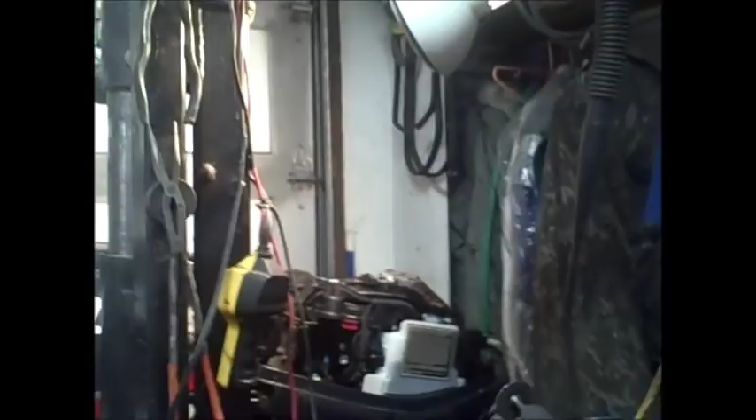And so we put a new water pump in it. Pretty straightforward as far as this one goes. It's a 2014. So yeah, let me show you the motor here. Okay, there's the bonnet for it, and there's the motor. It's a nice clean motor, and so let me get the parts that I had, and I'll show you what I found. Be right back.

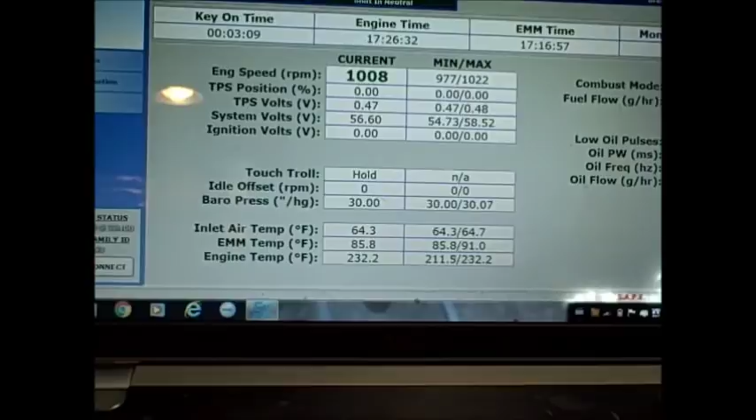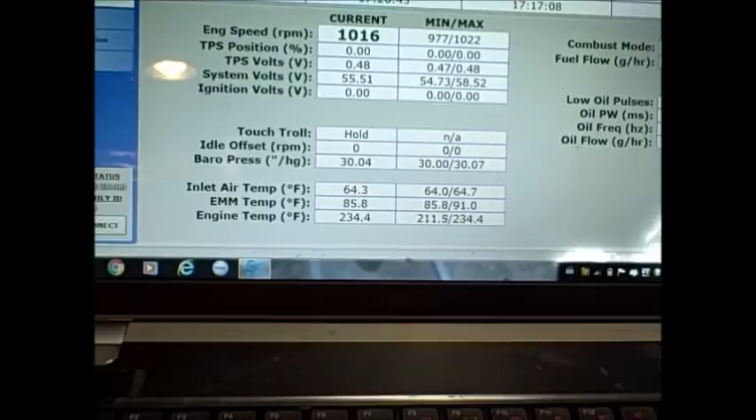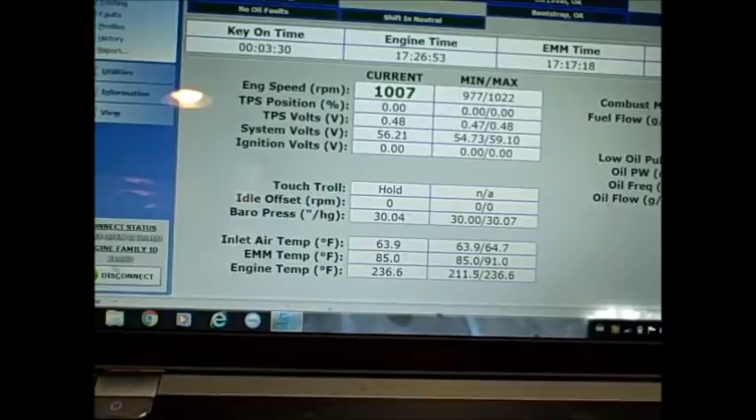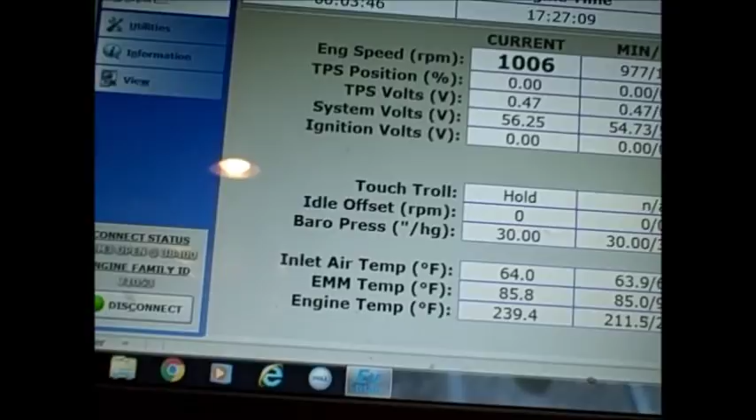And yeah, see, EMM temp 85.8. I'm just kind of talking out loud here, so I'm getting no low oil pulses. Interesting. The voltages, everything's outputting there. And you can see the engine just shut down there, and okay, no connection.

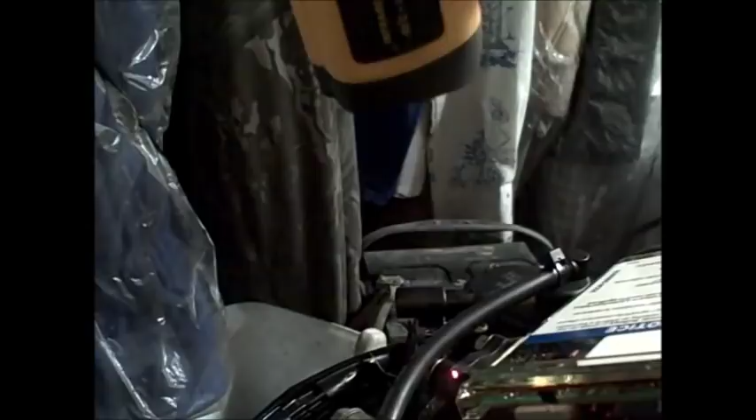And when I take my temp gun in, the engine actually smells warm. When I get up close to it like this, it may just be because it's fairly new. It said it only has 17 hours on it, but I'm getting 230 degrees there. That's hot. It is peeing, but it don't seem like it's peeing like it should. Let me get a couple more temperature readings. Okay, I was on the aluminum, on the injector side. Let me see. Yeah, 227.

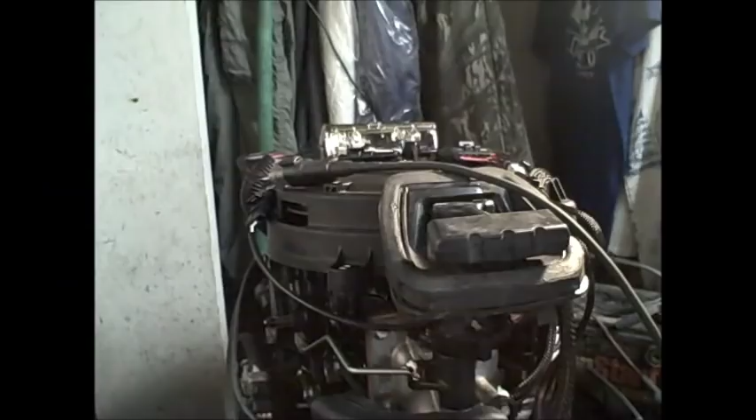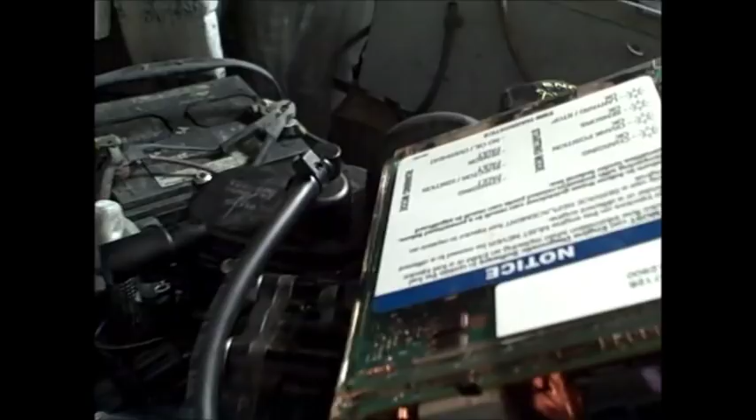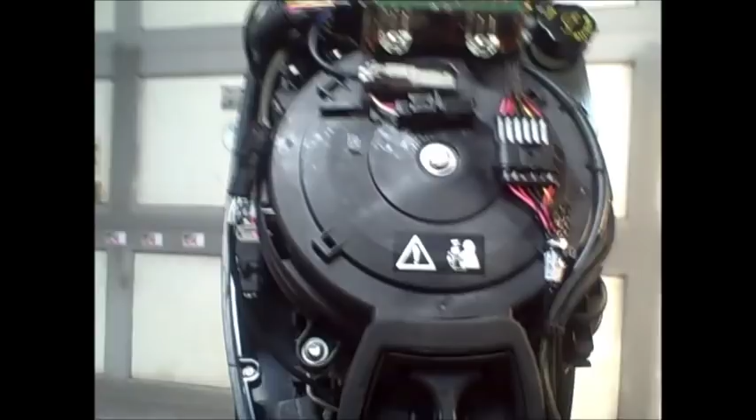Looks pretty clean in there, everything looks pretty decent. So I'm thinking maybe that's all it was. So we'll get a new impeller in there and see if that takes care of it. Be right back. This is an E30 DRL ABB 2014.

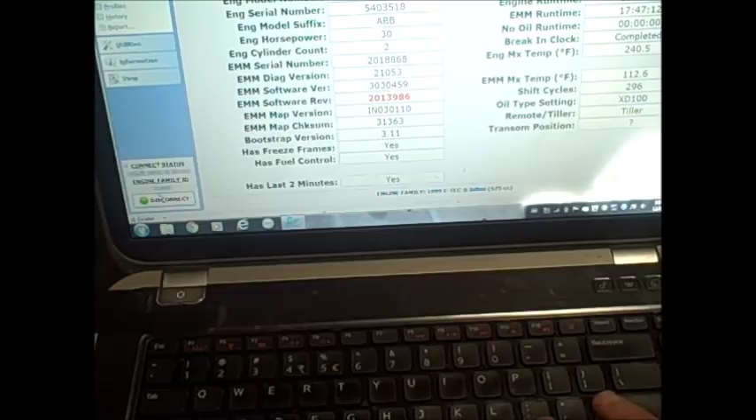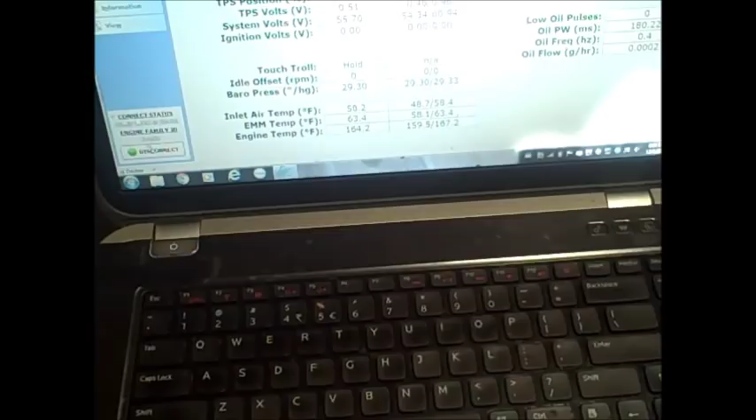You can see right here where at one point it got up to 240.5 degrees. Let's go see what she's running now. 164. So right at 165. So she's running nice and cool now. So I think we got that problem taken care of. Show you the little motor. There she be.

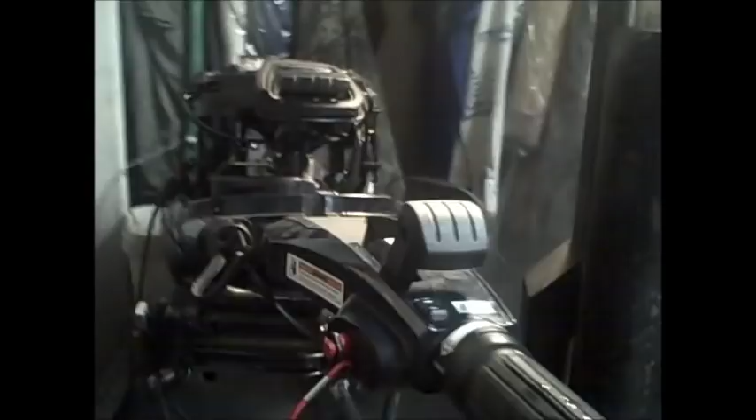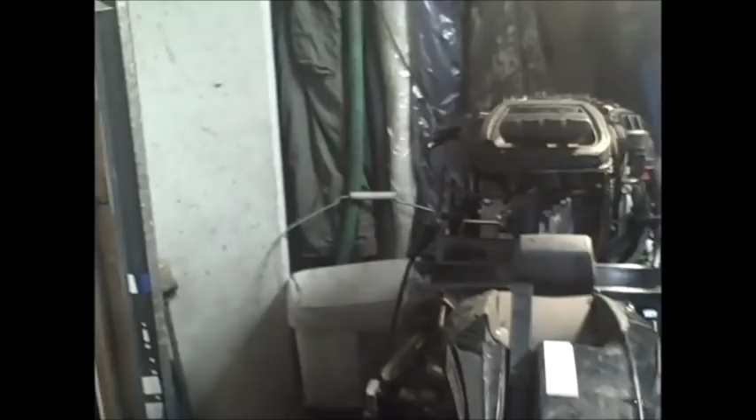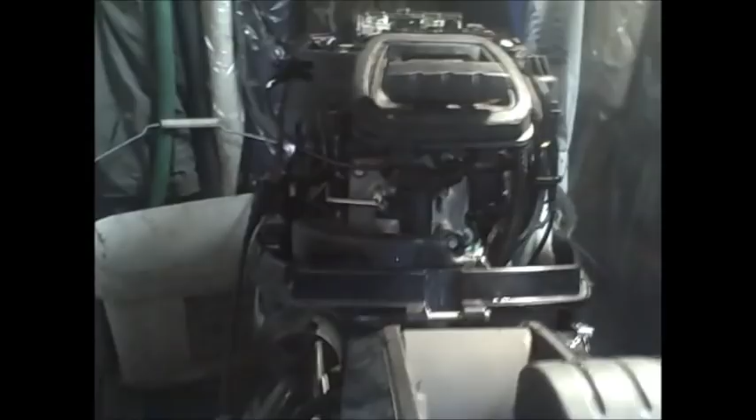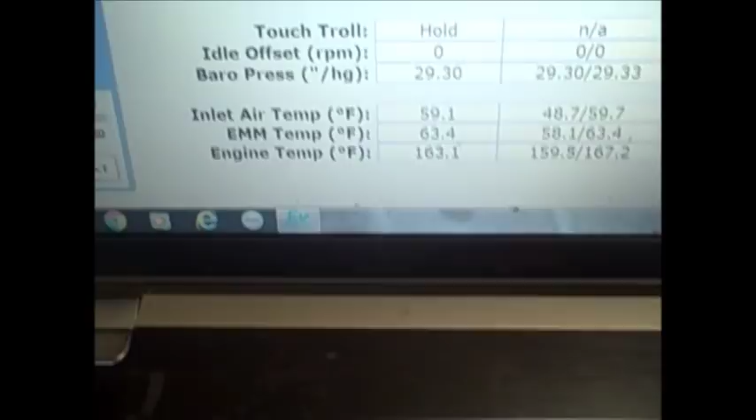We have no code lights up on the EMM. Everything's running nice and cool. I can put my hand there, no problem. And there she is. That's neutral. There's reverse. Forward. 163. All right.

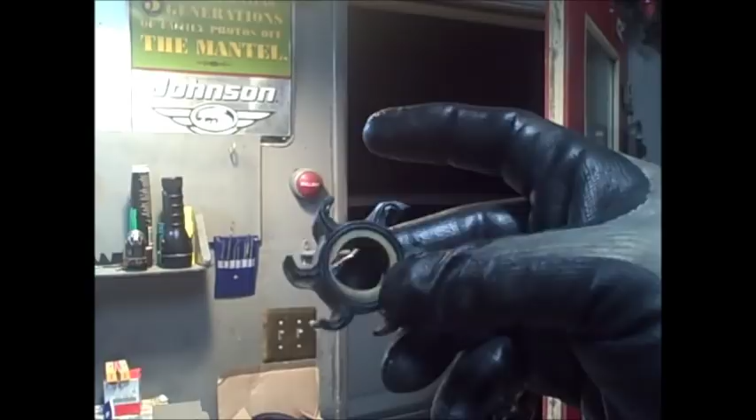So she's running at a nice cool 165-ish right now. The water pump was pretty straightforward, just like any other OMC water pump. But what I found was a really hard and memory set impeller. So she really wasn't pumping much at all. And it's real hard too, the vanes. So yeah, I found that.

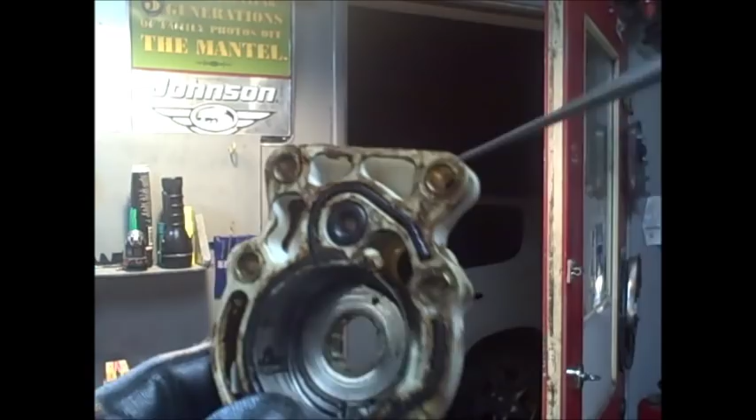And then if you look right in here, you see that blob of plastic right there? That shouldn't be like that. That's melted right there. So she got hot for sure. Yeah, that big old blob of plastic shouldn't be there. That's melted off this corner here. So that means that tin cup got really hot. So really bad memory set on the impeller. She got hot.

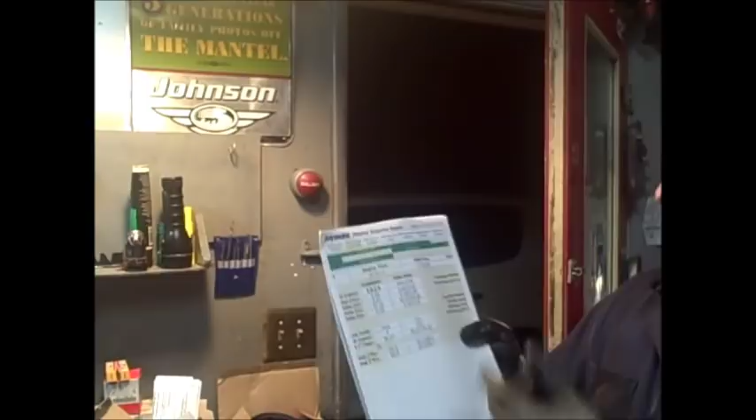After I got that squared away, with the software, I printed out a snapshot report for the owner, and it shows the temperatures and so forth, how many hours it's got on the EMM, and then the history. This will show the faults. It's just a report that I give the customer back so they can see what I did.

It'll show on the report where it was running hot, and then it shows the later minutes of the last test. It actually has the minutes on there, and it'll show during those minutes of the last run time that it was running at 164. So that gives him a good indicator that she's running cool now, running like she's supposed to.